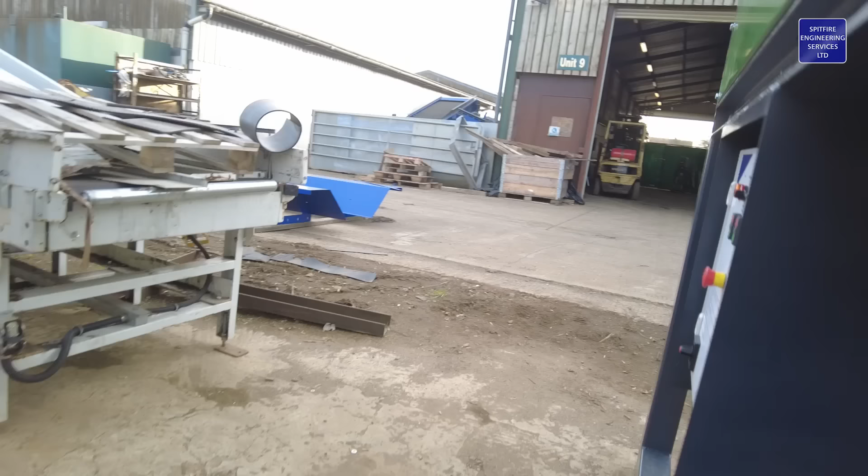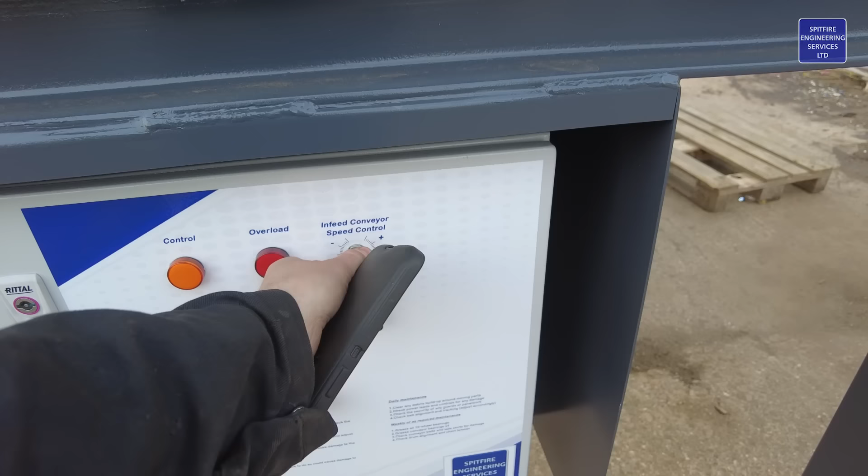We've got a standard infeed in this. If I come underneath, we've got the infeed in there, both the motors tucked over there, the cabling which comes down to this pretty snazzy control box. So the drum is at a set speed, that's a simple on and off, or off and on as I pressed it there, and then this is the infeed conveyor that is on and off with an inverter, so that adjusts the speed. Depending on how fast you're able to load it, or how fast you want the material to process, that is what you can adjust.

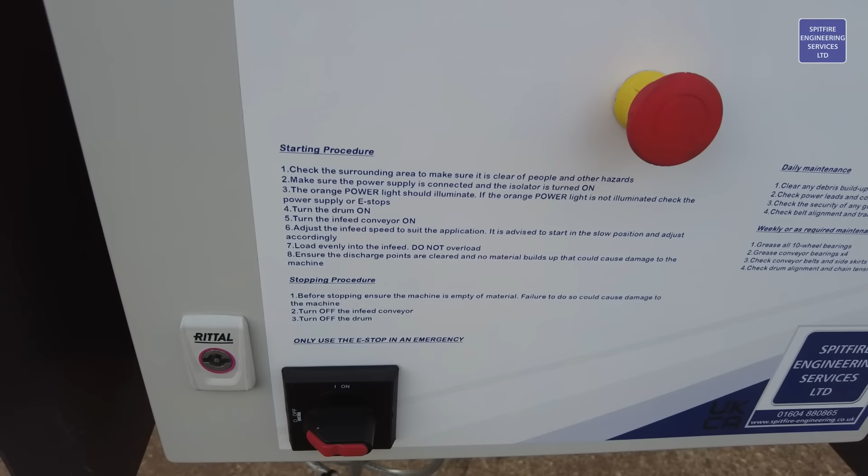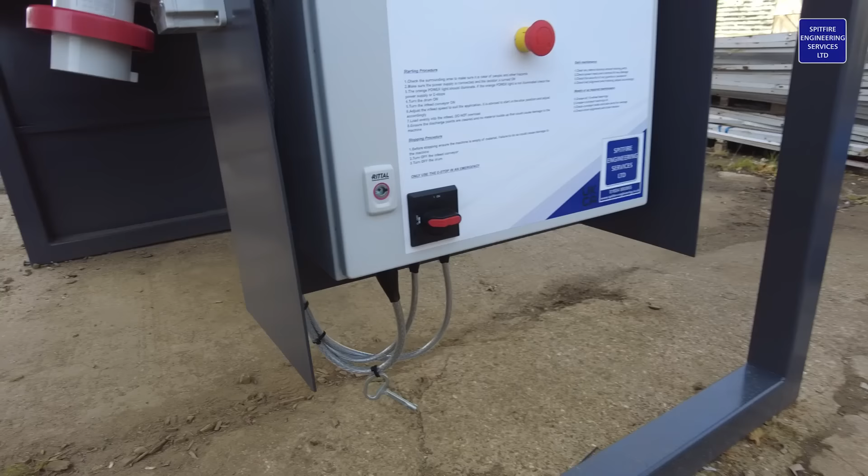And then just along here you've got all of the procedure for starting and stopping, and then the daily maintenance. So yeah, pretty cool bit of kit that is. And then it comes here with this lead, this plug here, which essentially allows the customer to have any size lead they want without having this dangling off and dragging everywhere all the time if they were to use an extension like the traditional way.

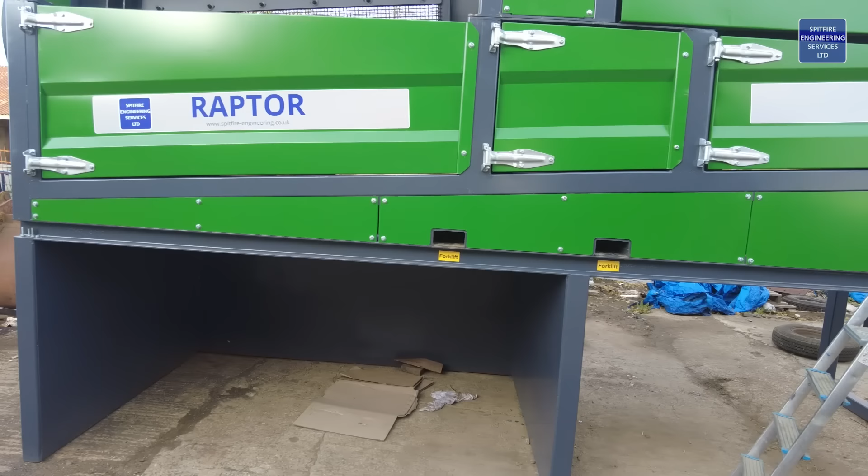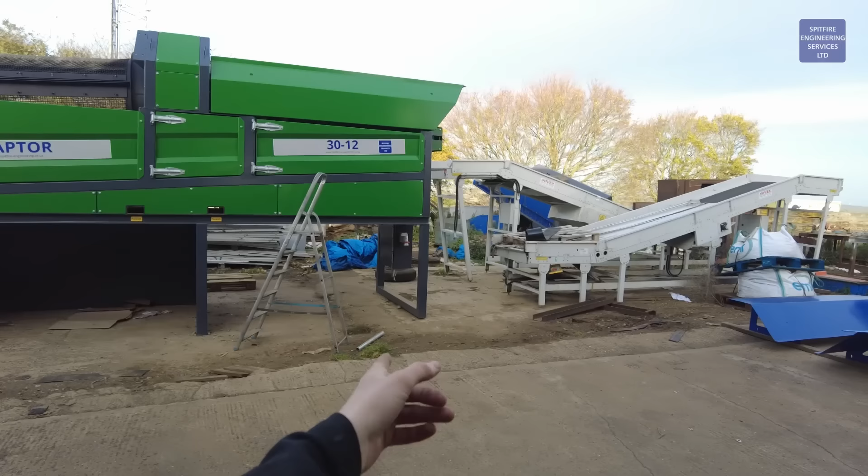So this is forkliftable, so we're going to load this onto the truck with a telehandler, I believe that is the plan. So this is great for carrying around sites, around your yard. Like I say, with the electricity over there, you can just pick it up and put it wherever you want. So if you've got power all across the yard, that'll work great. If not, it will work with a generator large enough, so Adam will speak to someone in the office and put the size of generator this machine requires.

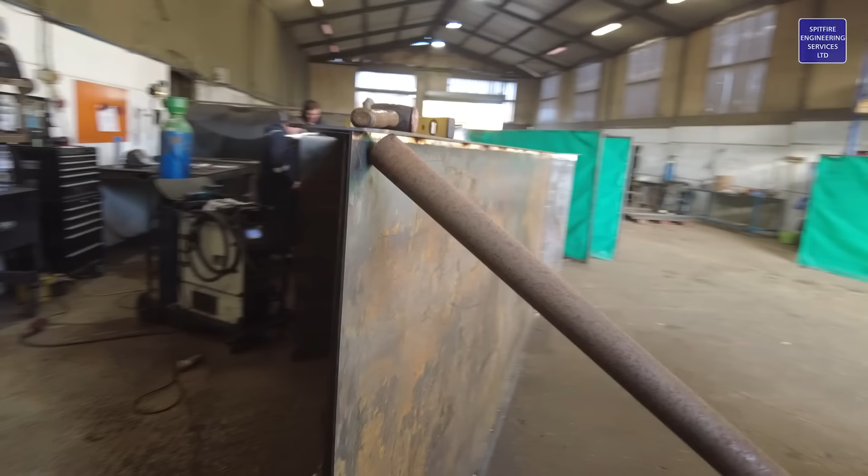So just over here, we've got Rob and Steve. This is the tank for the flotation tank. There's the heavies conveyor, which will be going in under here, and then the float conveyor that will go over there. Rob and Steve have got this tacked up within spec, so you can see that it's pretty big. I'm having to crouch down, I'm not that small that I can come in here without having to crouch down, but there's a fair bit of welding for them to do.

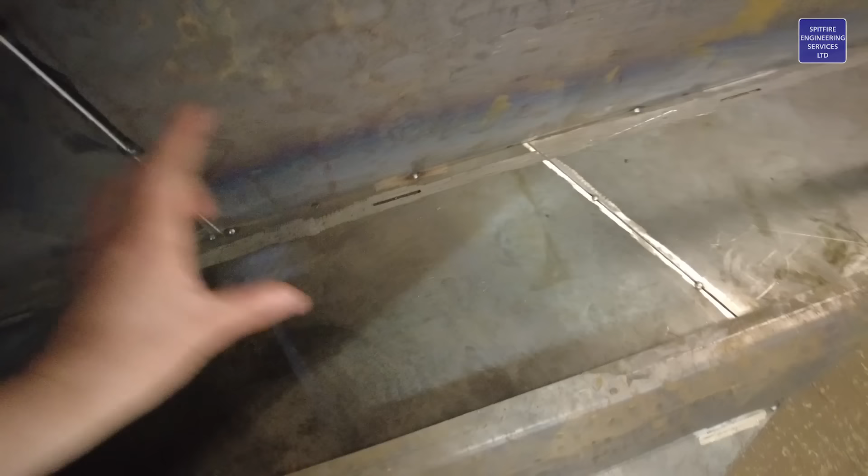So we've got all of this along here. There's then some more bits of steel to go over there, but they can't weld up this seam without it. So this can be fully welded inside and out. You can see there how they've got a nice gap the whole way along it, giving it full penetration, and that's the same on all of the joins.

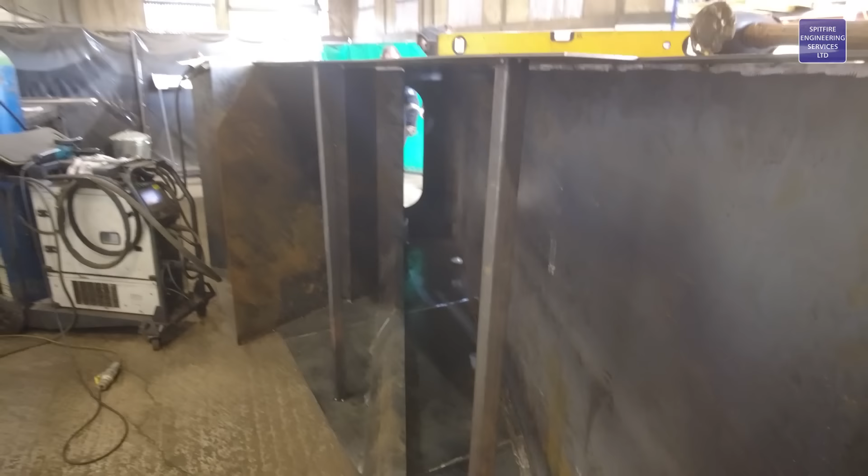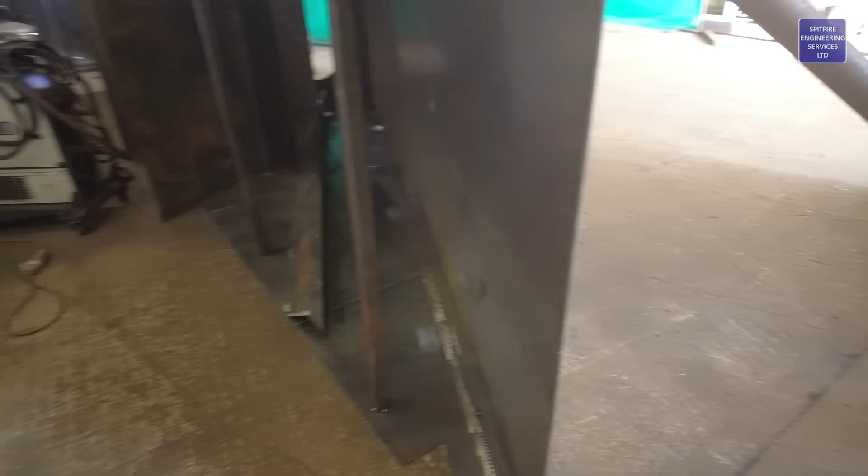Got a few bits of box section just tacked in place to stiffen it up while they are welding it and flipping it and whatnot. So yeah, I think the plan is to get this welded as much as they can today. The plan is ultimately to have this done by the end of the week, which is in my mind well achievable. As long as there's no big hiccups going forward, that does seem pretty achievable. So yeah, all tacked up, ready to go. Coming through into Rob's bay now.

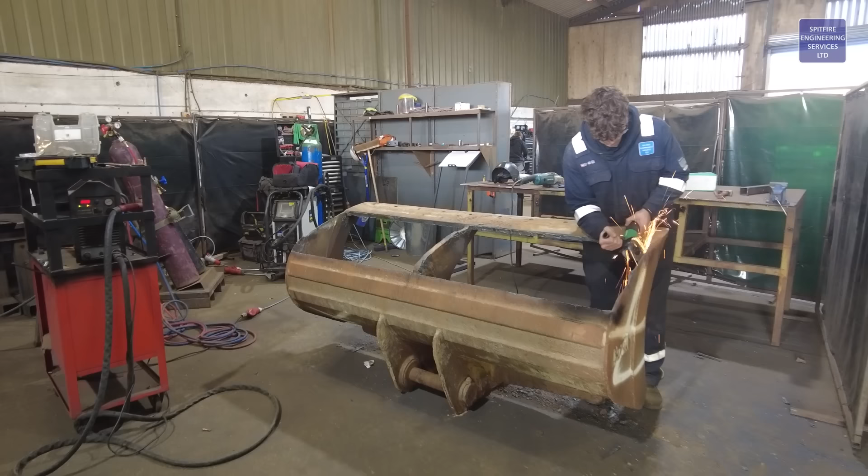Rob is not in there. We've got George, who is currently working on a bucket. He's been trying different styles of cutting the bottoms out of the bucket - on one side he used the oxyacetylene, and on the other side he used the plasma cutter. So there's pros and cons to both.

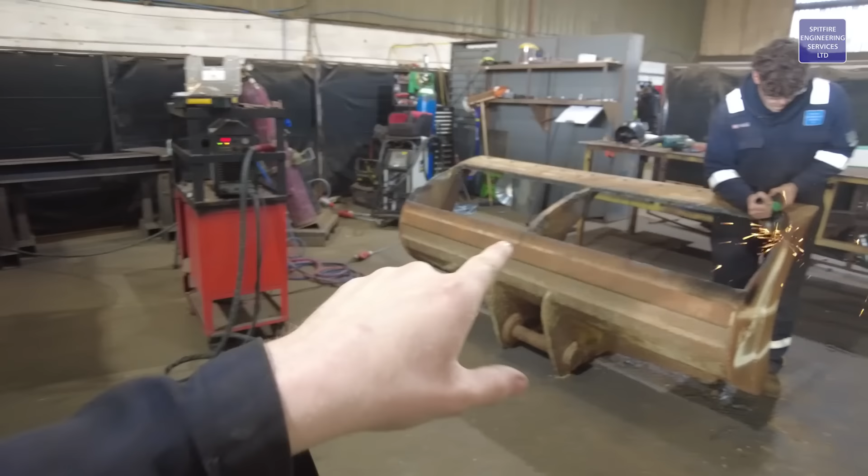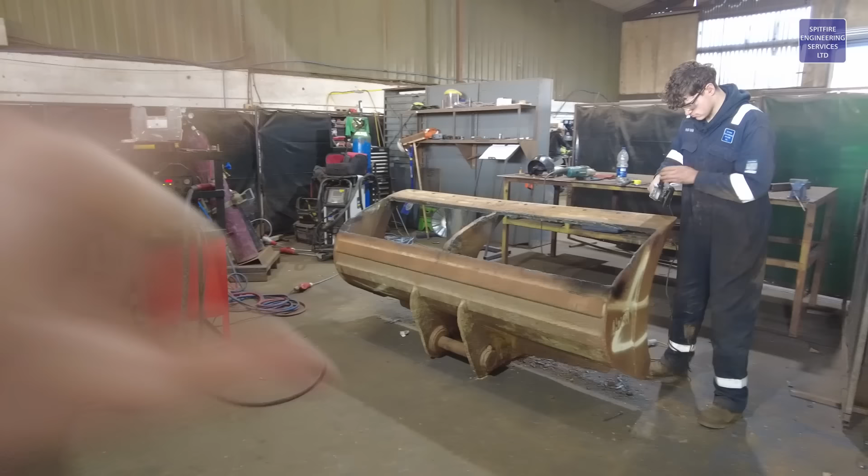You obviously need electricity if you've got the plasma cutter, which is hooked up there - electricity and air, since ours doesn't have a built-in compressor. So George has had to get the airline running through, which isn't an issue. The oxyacetylene is just on a little skid that we can forklift around. But what we've worked out is George actually works better with the plasma - we find it cuts quicker, it's cheaper to run than the oxyacetylene, and it gives a nicer cut.

So this is George's cut here, which for his first proper time on a plasma cutter is not bad at all. That is great, just needs a little bit of grinding and then that's all done. George's next steps are cleaning it up like he's doing now, and then measuring up to cut the floor.

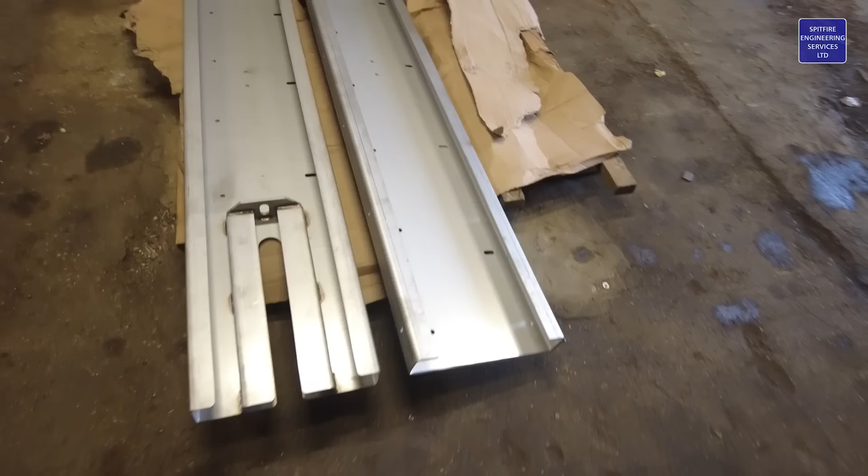So Connor is in the little workshop now, and these look a little bit different to our normal type of steel that we use. This is stainless steel, because this conveyor is almost fully submerged within the water. Connor has been TIG welding these parts up.

We've got him outside of the main workshop - there's a lot of metal dust flying around, a lot of contamination. So to minimize the risk of contamination from mild steel impregnating this stainless steel and causing it to rust, Connor is in this little workshop just tigging it along.

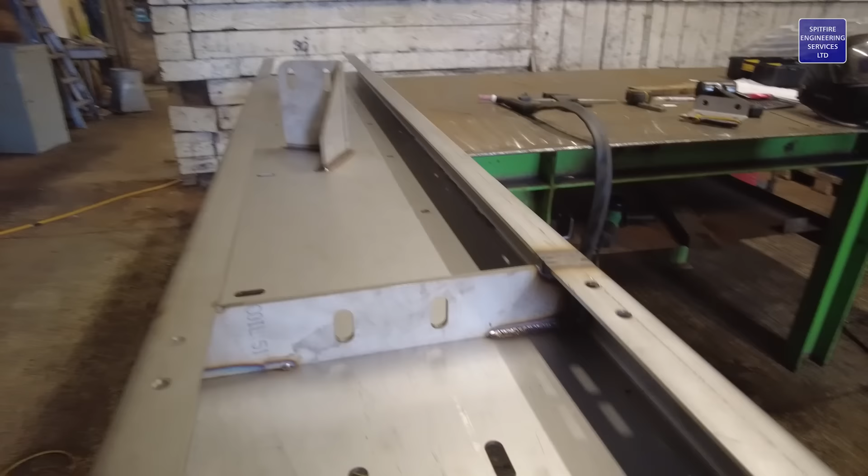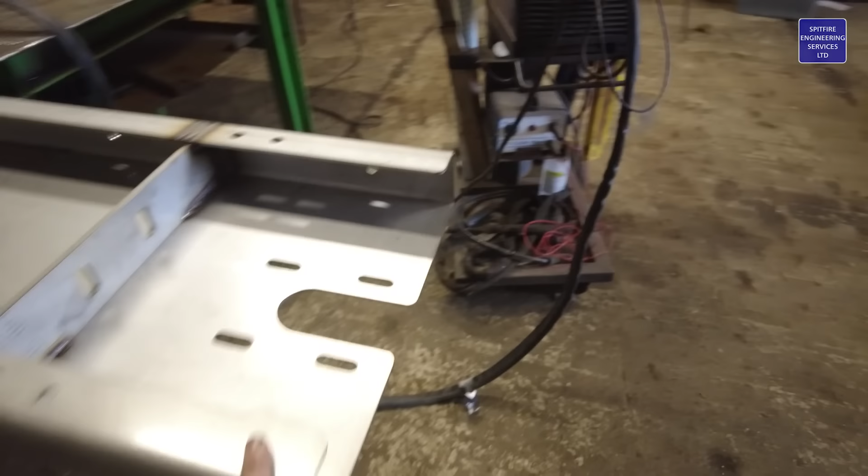So he's got another one of these to make up. I think he's fully welded this now, or nearly fully welded - he's got a little bit more welding to do there. Once fully welded, this is the head end of a conveyor side, and those are both tails. So he's got another one of these head ends to make, and then welding each head to each tail section, as well as a few cross beams.

So yeah, he's getting on nicely with this - not too much left of this now. We were talking earlier, we reckon it'll probably be done today-ish at some point. Not 100% sure when, but aiming for the end of the day for these stainless steel conveyor parts, and then probably going on to the tail roller for this, which is also stainless steel. So that's going to be a little bit interesting - however, very achievable still. Just got to give Connor the time and space he needs to get it tigged up.

So TIG is 9 times out of 10, or 99% of the time, a much slower process than MIG welding. However, it's a lot cleaner - it's much better for stainless steel. You can stick weld stainless steel, and I'm pretty sure you can MIG weld it too with certain wires and machines. We do have the capabilities, but Connor isn't trained up in stick welding stainless, so this is the best way of doing it. As I say, it's a lot cleaner anyway.

So these welds, nice as is, and then just under there is a weld cleaner. You put some solution on, brush it on, and it uses electrolysis to clean the weld - that removes any of that colour. It doesn't affect anything, no negatives or anything like that. It's just personal preference, and as a company we don't want it there - it just doesn't need to be.

What you often see is a lot of exhaust people - the fancy titanium exhausts or stainless steel exhausts people get on their cars - they often leave the colour on there and try to get certain colours on there. So there is a time and a place for it, however it's not necessary for what we're doing. It looks a lot smarter with it all cleaned off, because it just looks better 9 times out of 10. So yeah, that's the update from the workshop on this Tuesday morning.

So Adam's back behind the camera now, very happy from my side. He had a lovely time in Amsterdam, I'm led to believe.

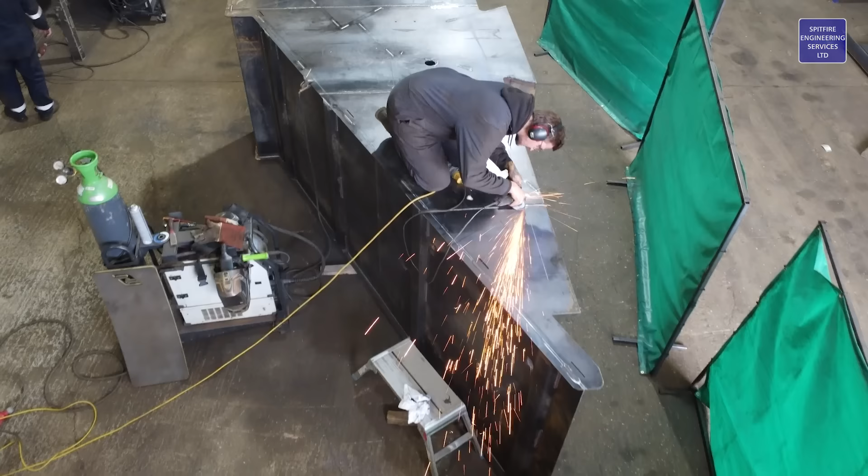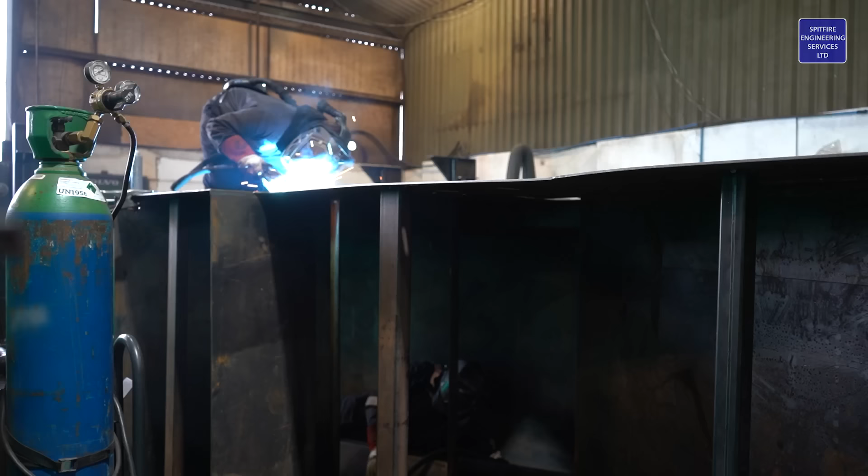In the workshop right now, we've got Rob and Steve in this bay, two bays conjoined into one at the minute. They are currently both welding up the tank for the wash plant project, the flotation tank. Steve's on the inside, Rob is currently on top. Two of the three sides are now done, and then they need to flip it. Once they've done this side, flip it up so it's stood up like it will be in use, and then weld that last side, get a few more beams in.

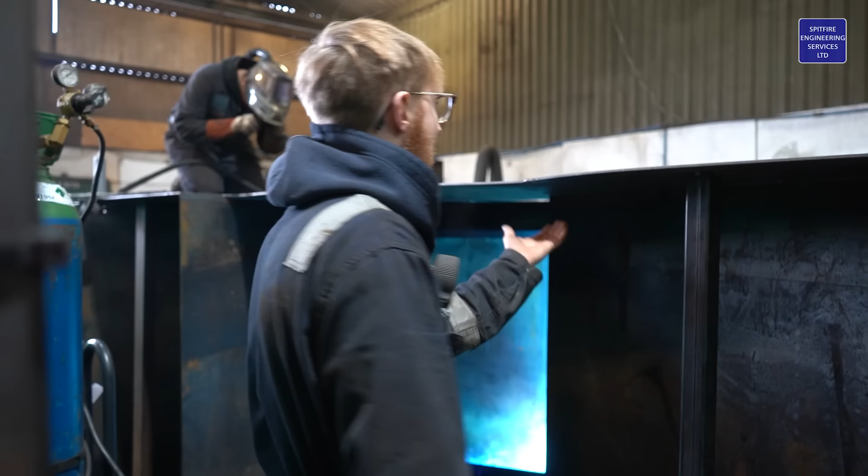You can see where there's a bit of distortion here, but once they've fully welded it and cleaned it all back, that will straighten itself out. We've still got some bits of angle, which Rob has already fabricated, to go along here, and that is what it's going to sit on onto the frame.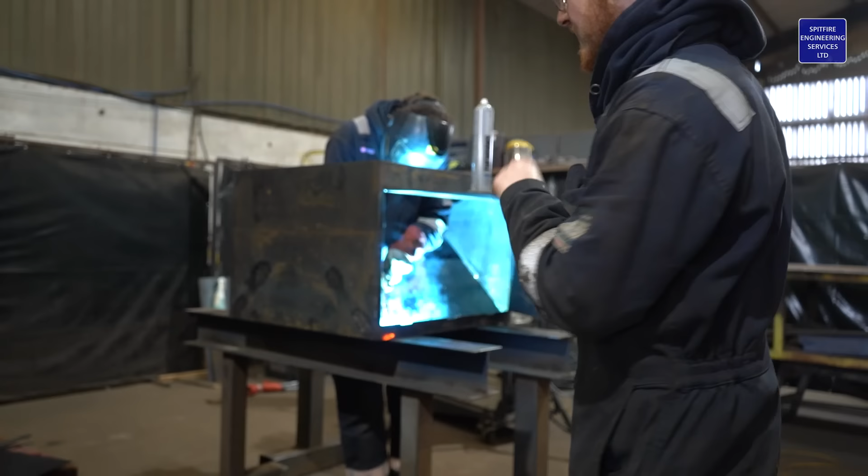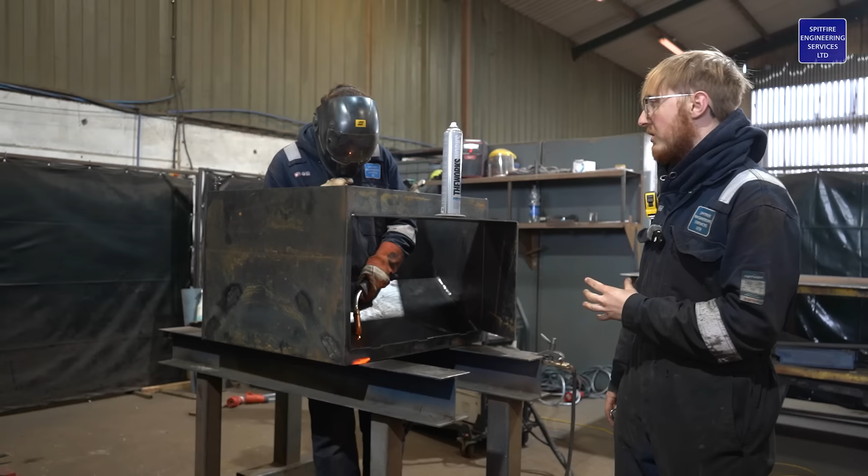Coming out of this bay and into what is Rob's bay, George is in here. George is currently welding the top deflector tank for this same wash plant project. This is the top bit where there will be a fan, I believe, sucking out any of the dust, and then the material will be loaded into here. George is just sorting that out now.

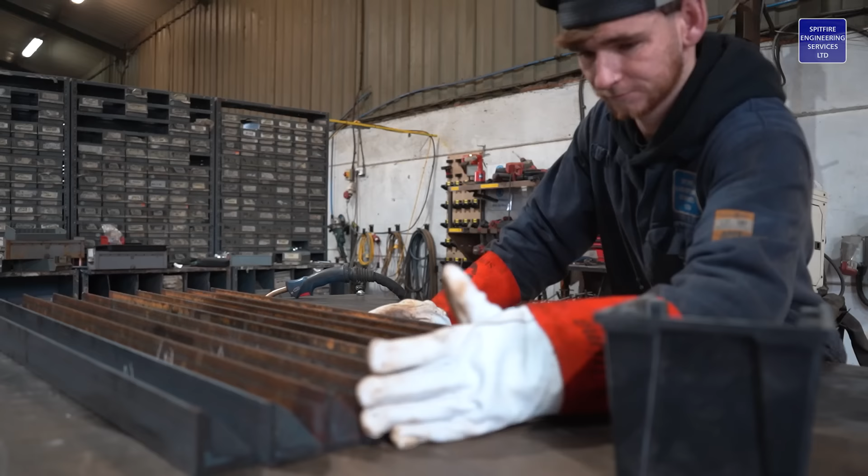Next bit I find interesting. Due to the workflow and how everything's organised itself, we've now got Ashley doing a bit of welding. Ashley does have previous experience in welding and fabrication, bits and bobs. He is about to be welding up some of the IBC lifting stands in this area, the assembly area. However, all of the main fabrication bays are full, and the small workshop has got the stainless steel conveyor in, so we don't want to be contaminating that. We'll leave it in there until all the stainless is done, and Ashley's going to be in here fabricating some of those IBC lifting stands.

This is the stainless steel conveyor. Connor has fully welded all this, and it's ready to be bolted up. We're going to leave it as is for now until that main tank is done and we can test fit it in there, because it will take up a lot more space once it's fully bolted.

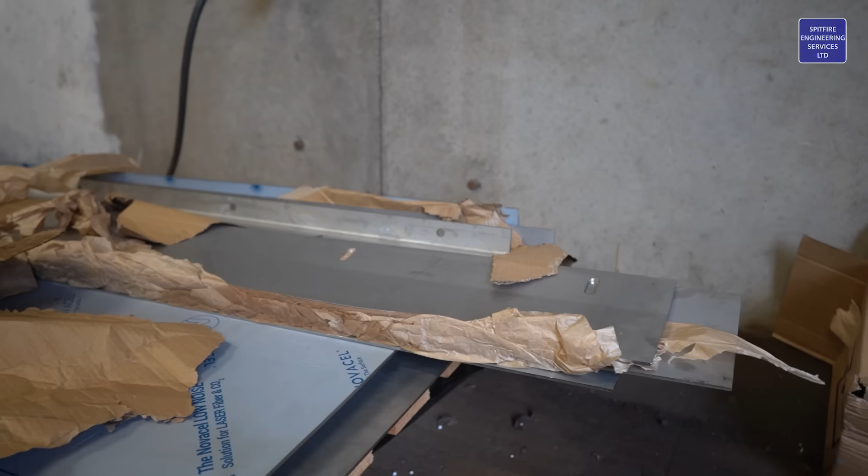There are middle trays, which the conveyor belt is going to go across. There's the main sections for the conveyor, side 1, side 2, the cross beams just here, and then a lot more of the side skirts and deflectors over here. So it's all ready to go now, just waiting on the stainless steel roller to be fabricated.

The tail roller is fully submerged, so that is going to be made out of stainless steel. However, the bar coming for that stainless steel tail roller, the skeleton tail roller, has come in at 16mm, and the holes on the laser cut stainless sheet plate steel are made to fit 20mm bar. So Melissa in the office is currently pricing up both. 16mm would be fine, 20mm would be fine. It'd be easier to fabricate out of 16mm, so hopefully it comes back cheaper, that we can get new laser cut parts to fit the bar, as opposed to getting new bar to fit the laser cut parts.

A little slight hiccup there, but in the scheme of things, not really a major issue. We're not in a rush to get that tail roller in, it doesn't need to be in for the test fit up, which we are hoping to do starting next week. It's Wednesday, late morning right now, and we're hoping to do the test fit of that main tank, as well as hopefully these two conveyors, early next week, which I think is achievable.

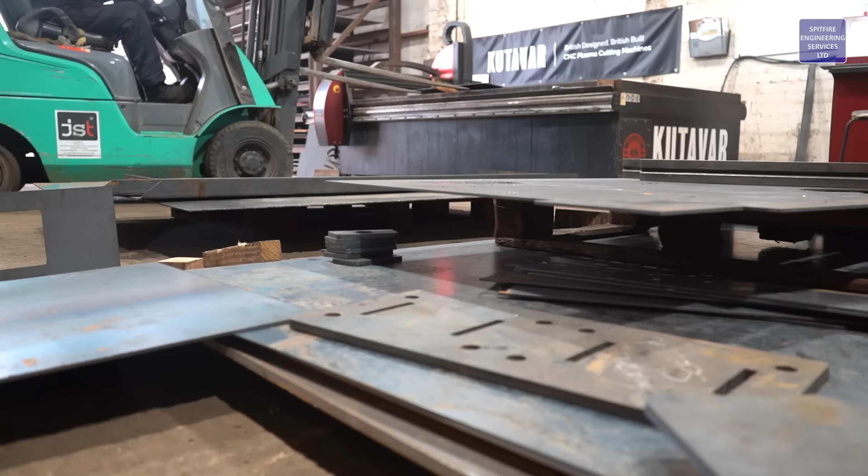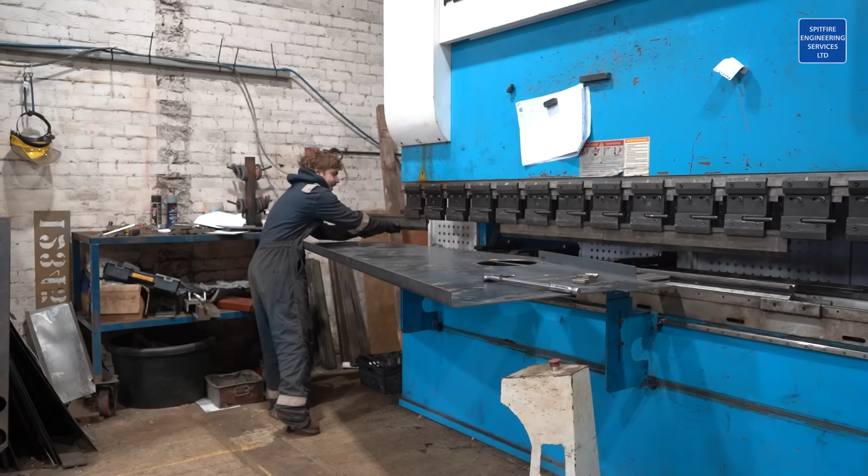I'll show you where Connor is at in his folding. Connor is currently in the cutting room on the brake press at the minute, swapping the tooling out to do the folding, and currently folding the dewatering screen. That is the somewhat separate part of the flotation tank aggregate processing plant, a standalone part, but it works in unison with the flotation tank. Measurements on this need to be absolutely perfect. We normally work with a couple mil tolerance, however it's even smaller for this specific part. Everything Connor's doing now is going to be paramount to make sure it works.

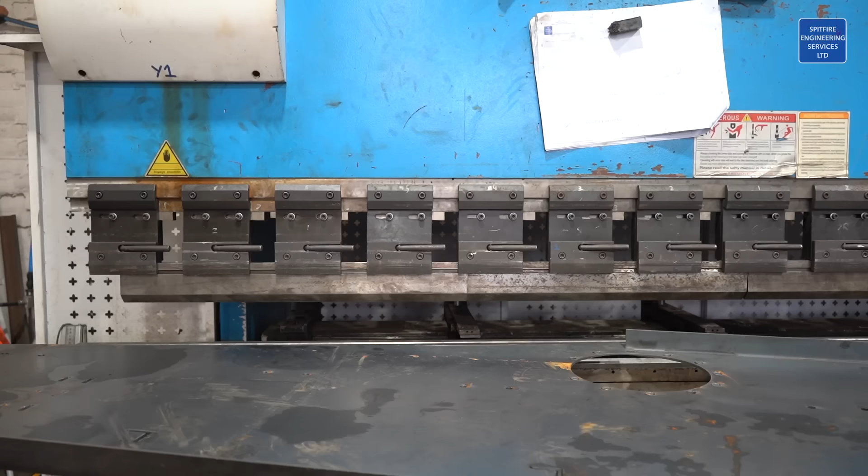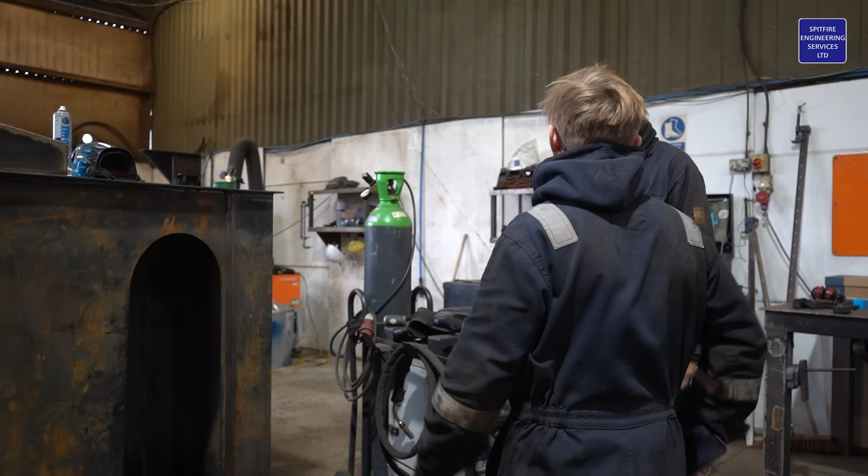You're doing both of them, the internal bits, when you flip it over? The internal bits for that. Oh, the conveyor bits, yeah. We're welding that fully. And that's all that's left for this side? Yeah, we'll do that in situ when it's the other way.

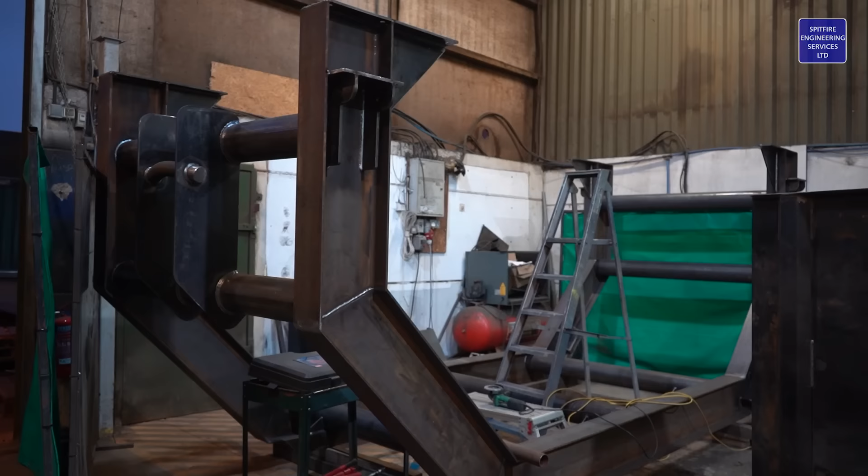This will be done end of the week easy, if all you've got left is them channels, the inside bits, and the door, and that tank thing. So that is Rob and Steve. They are welding this top angle bit, which is going to sit on the frame. That is the joiner between the frame and this main tank. That is all they've got to weld on this side.

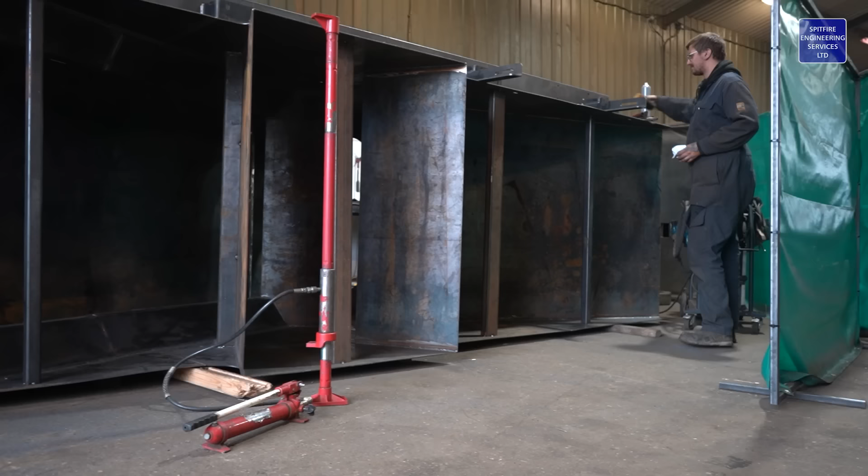And then they're going to flip it over 180, or I think it might be 90, and weld on some bottom conveyor slots, so it's just where the conveyor is going to sit onto, one of the conveyors. Then they'll flip it another 90 to 180 from where it is now, and weld on the other bit of angle. Once they've got it all welded up solid, they'll know exactly where that's going. And that is this done as much as it can be, pretty much.

So yeah, really not a lot left on this, and it's currently 3:15 on Wednesday. They said they'd have it done in a week, and it's looking on track to be done in a week, if not less, because the stuff they're doing now can't really go wrong. Other than the door at the end, they've already done most of it this side, so it's just the other side, which should be fine, and welding, which is the easy bit.

Nearly there. Yep. Cool. Ready to get jammed up and just bugger itself. You just get jammed up and bugger itself.

So just helped Ash put the wire back through the welding torch, it just got a little bit jammed up, don't know why. That's all sorted now.

So when you are feeding wire through a welding torch, it always helps to have it extended as long as possible, or as straight as possible, I should say. That just helps the wire so it doesn't wrap up. You can do it with it all coiled up, but there's no point. It's so much easier and less wasteful when you do it straight.

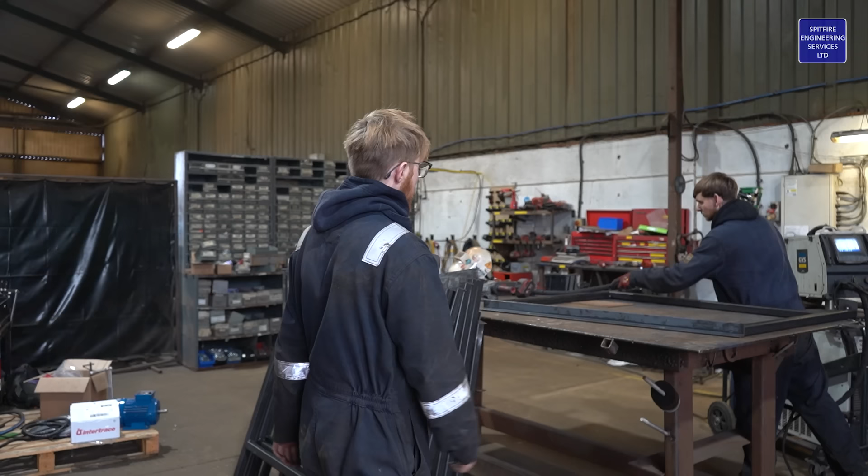So just doing that. Since you last saw, Ash has tacked up all of the sides for these lifting stands. They are a nice amount taller than the other ones previously. So yeah, these are a metre, I think, from this front edge, give or take. Yeah, a metre from this front edge.

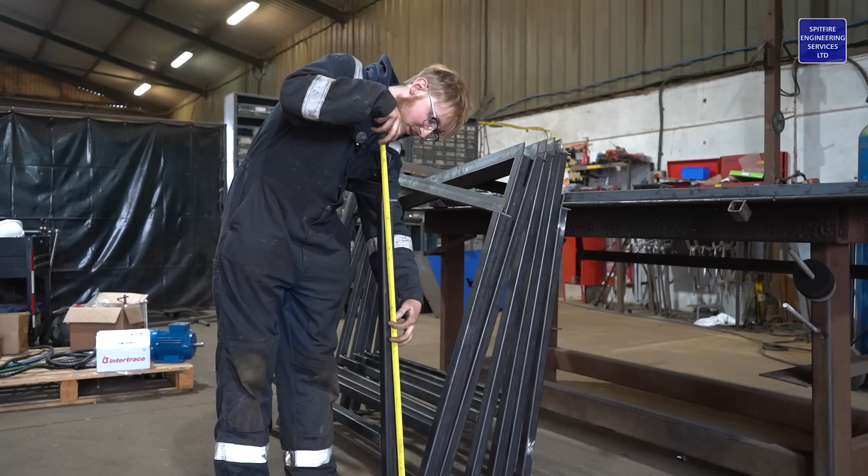So actually just tacking on some of the side posts here. These are the joiners that will go between, and there's also the angle iron joiners that will go between up here. So yeah, Ash is just going to get the rest of these tacked up like so.

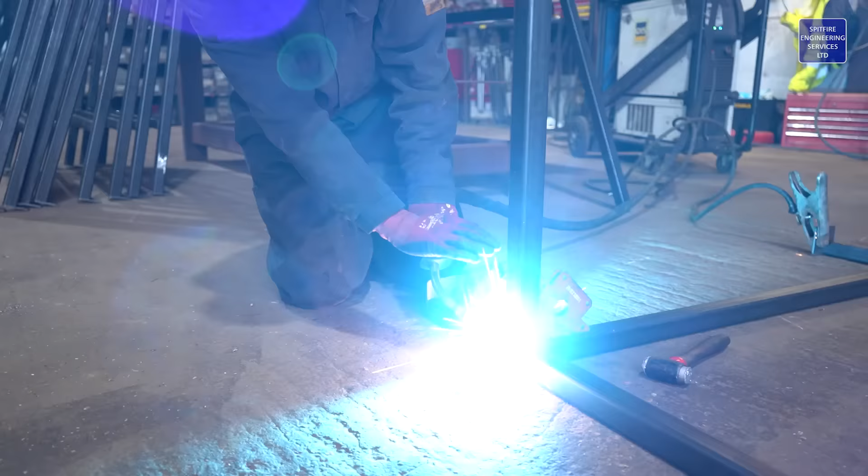And then him and myself are going to get the other sides on top. So let's say it's 3:15 now, we'll have, I'd imagine, probably all of them about tacked up fully by the end of the day.

So Thursday morning, I have got Adam with me. Adam's been on holiday this week again. All he ever seems to do is have a holiday, and all I seem to do is struggle to get content filmed because Adam's just not here. How many holidays have you had now this year? I think you've had more than me. So this is the first time on Thursday morning that me and Adam have actually spent any time together.

So I've got to go look at a job at Wellingborough for the council, believe it or not. Looking at a job for them over there. So I said to Adam, jump in with me, come over there, we'll do some filming and talk about some content for the future, different things, just talk about YouTube, have a little catch up. So Thursday mid-morning now, Adam is currently on site with Gav. I'm sure you will have seen or will be seeing some clips soon. So I'll just show you around the workshop, see what's happening.

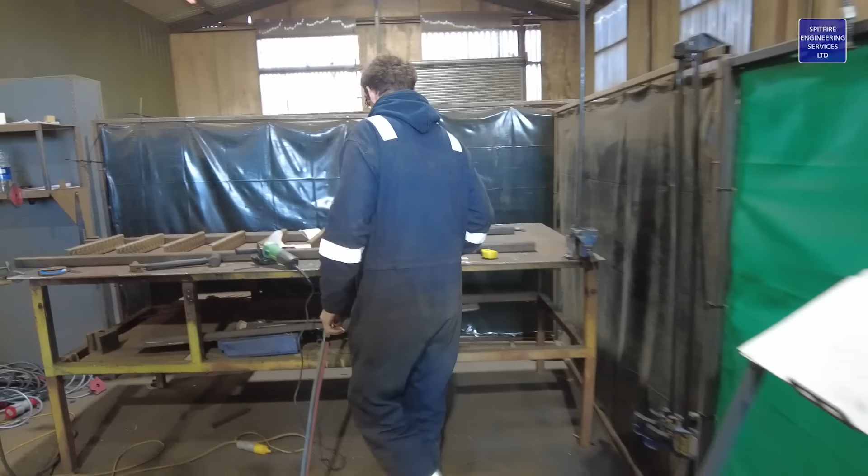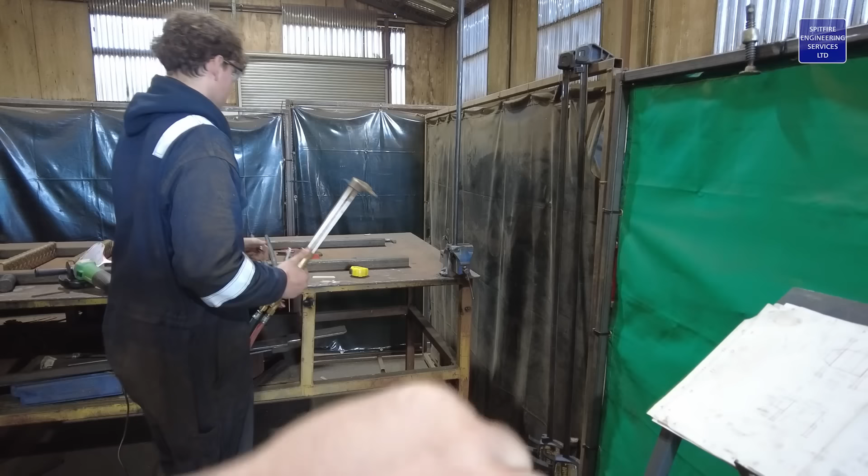So we've got George in this bay at the minute. He's currently in the process of fabricating a ladder. Well, there's two ladders, both identical, for the framework over there, which we'll show you in a minute. What he's currently doing is bending these bits of bar to act as the handles. So we've got one over here, which he is very kindly handing over now. Just put this on a trestle and show you guys.

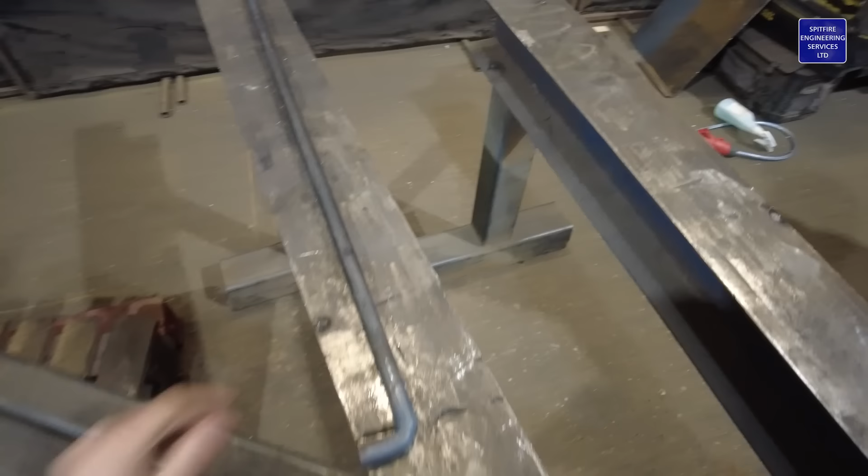Nice long handles, very easy to bend, just need a bit of cleaning up afterwards. Just heating up the gas axe, takes a couple minutes per handle. A lot easier than cutting and welding and cleaning back.

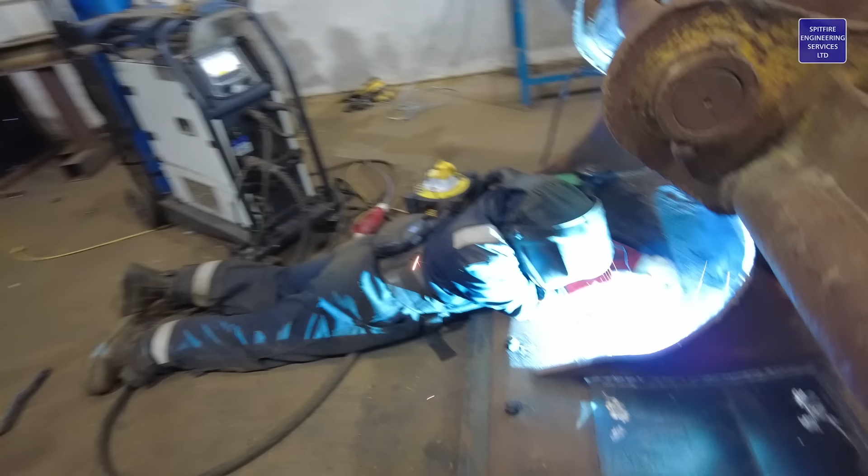So George is on that now. We've got Connor in his bay, currently welding the inside of one of these digger buckets. Not much left on this now, looks like one of his final runs. He's just finishing off that middle spine, then he's got this front edge onto the cutting edge to weld up. So he won't be too much longer on this one, then he'll move on to the next bucket.

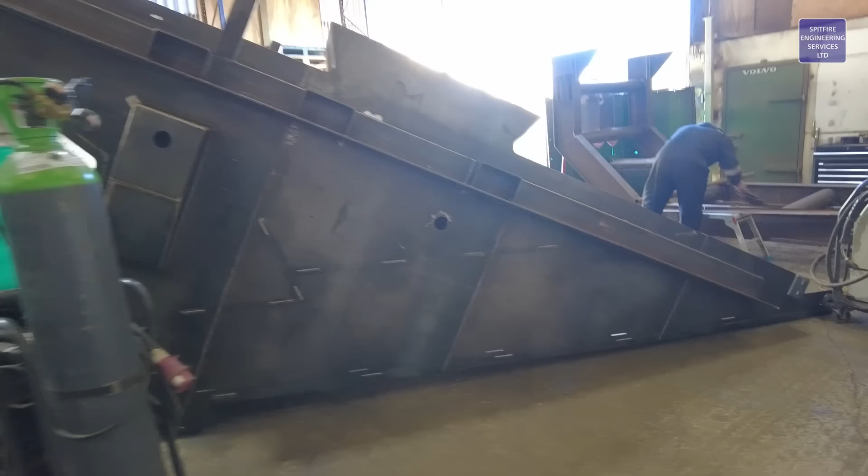Coming over to Rob and Steve now. The big tank has changed shape once again, or changed position once again. So it's now, so far, the closest it's going to be to the final shape. If you can imagine, that beam there will be level sitting across inside that frame. So two posts there, and then you've got bolt holes at the top and at the bottom, so they've been mag drilled out ready.

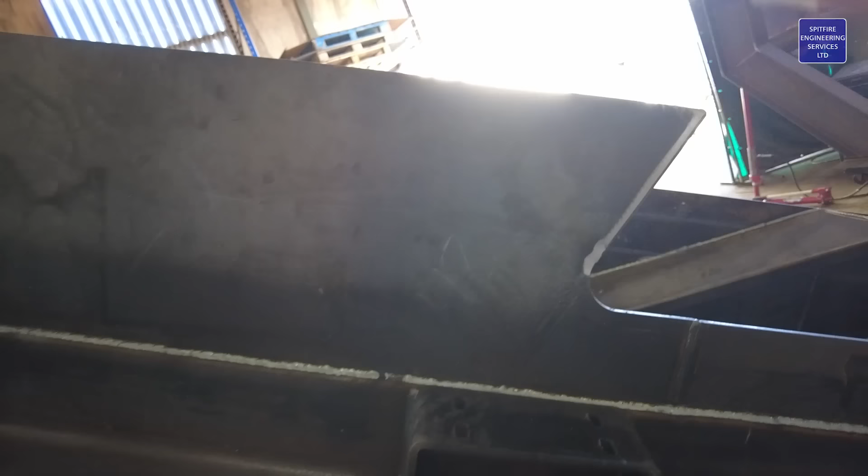On here we've got the mounts. These, I believe, are for the cross beams which George fabricated yesterday, and those two are for one of the conveyors. So Steve and Rob have got a few more bits to weld up and fabricate inside here, including the inside tracks which go along there. A few more things to weld up, and then this tank is pretty much done.

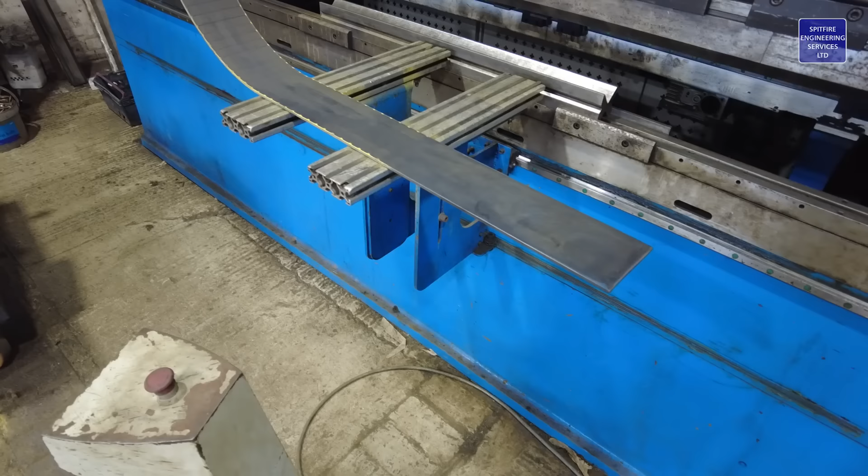At the minute, Rob is currently folding the back hatch door bit there. I'll show you that in a minute. So this is the profile of that hatch.

Rob has got two bits like this, and they will eventually form a set. So this is one, and there's another one to go on the other side, a mirror image of each other. Rob has got two bits like this, and George has done him a template.

This is the template that's been cut out of 1.6 mil, it looks like, with all these little notches in it. These parts were designed before this template. This is a hindsight thought, which George does normally do on a lot of stuff, putting these little notches in so we can just use a square to mark across all the lines. But due to the fact that this is going to be seen a lot more, we wanted it to be a nice smooth edge.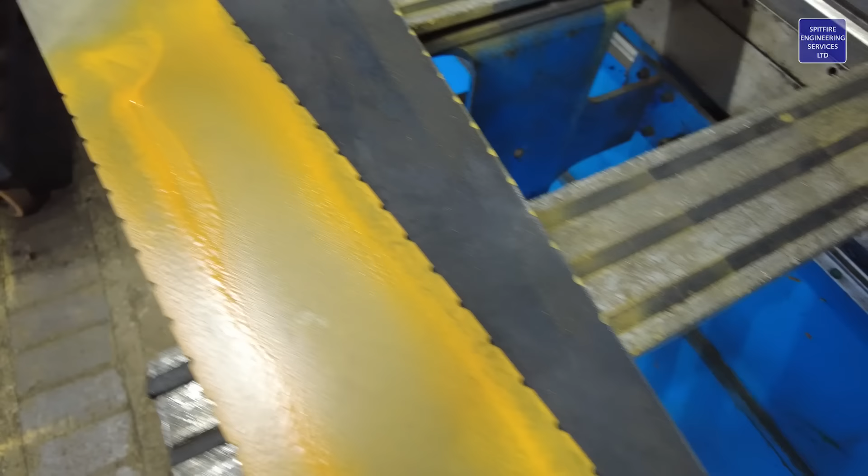The template has gone along, and then Rob has sprayed this with some line marker paint, so you can see all the little yellow dimples where he's folding. He's up to that fold there where you can see the brake press line, and he's still got the rest of these folds to carry on doing. So he's got a bit more folding left on these, and then it's time to start putting them in and getting the hatch on.

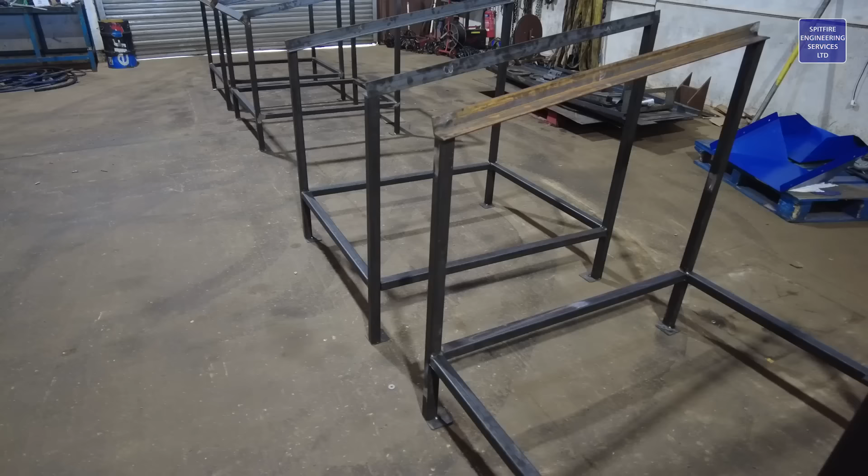So these IBC lifting stands are looking pretty good, nearly tacked up in position, just need the front and back beams going across, so there's two more left to do that for. These two here are fully welded, ready to go through paint, and Ash is currently welding the third one there. A little bit longer on these, and then these will get painted today.

Now, if you're watching this the week it's been released, it has been National Engineering Week. We record these episodes a week in advance, so for us now, through the power of magic and YouTube, I'm actually talking about next week, but by the time you see this, it's just been Engineering Week. That relates to everything engineering related, and it's a week used to promote engineering, the sort of stuff we do, encouraging people to get involved in engineering and celebrating how brilliant engineers are in society now.

This also reminded me of a fact that if you cast your mind back probably six or eight weeks ago, Archie and Connor both took part in a competition at Northampton University. Adam's going to put a little short clip in there just to remind us exactly what they did.

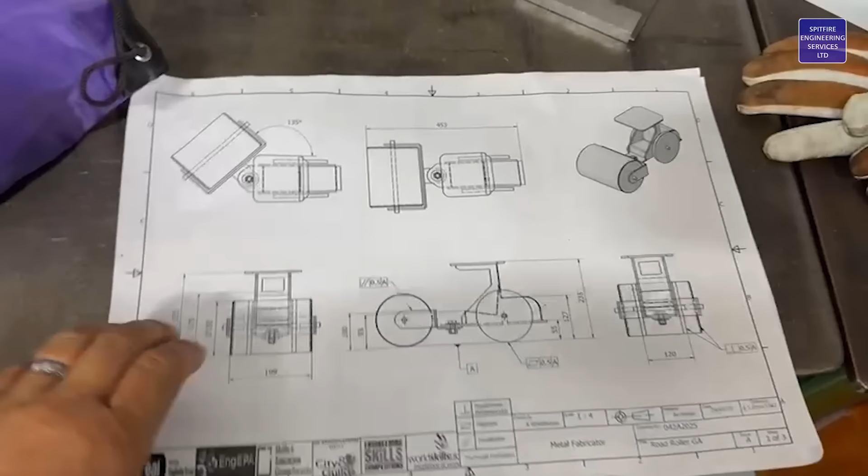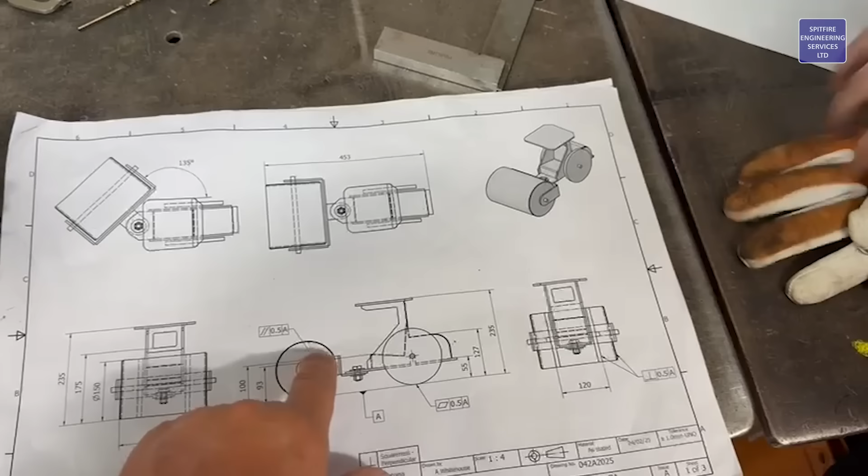So this is what they get given - this drawing, engineering skills competition at the bottom. Basically it's like a steamroller, a road roller, and they've got to make this from scratch. This panel here is cut apparently, but everything else they have to cut, roll that as a ring. So this isn't a piece of tube - they actually roll this here and cut all these other bits and pieces and put it all together.

So they've got all the drawings, and this is what they have to work to. As I say, this piece here is actually a profiled piece that they give you.

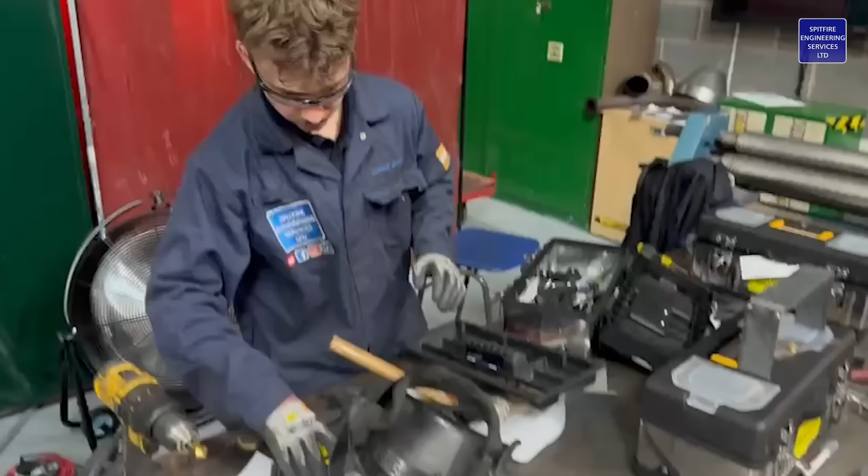How are you getting on, Connor? Stressful today - has today been stressful for you? Yes. Have you found it stressful today, Arch? Very. Arch has found it stressful.

I think it's a kind donation, isn't it, from United Welding, and they've asked me to do the honours. And today's winner is Archie. Well done, Archie - I was nearly walking off with that. It's yours. Cheers, thank you.

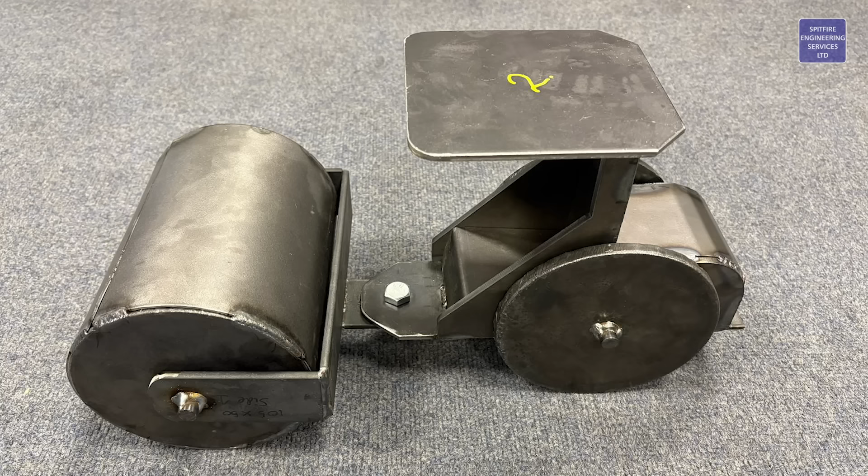So Archie won that competition at local level, which means he's gone through to the national finals. He's going to spend an entire week in Wales at the end of November, and then there's an award ceremony at the end of that, which I'm going to, and hopefully we'll do a little bit of filming when the time comes. If he's successful there, he will go through to the world finals, which apparently is in Shanghai in China. So we've got that coming up next month, and we wish Archie all the best - hopefully he's successful and he can go to China.

So we've got Rob and Steve here. Rob is currently over there, Steve's currently over there, and Connor's on the gas axe over there.

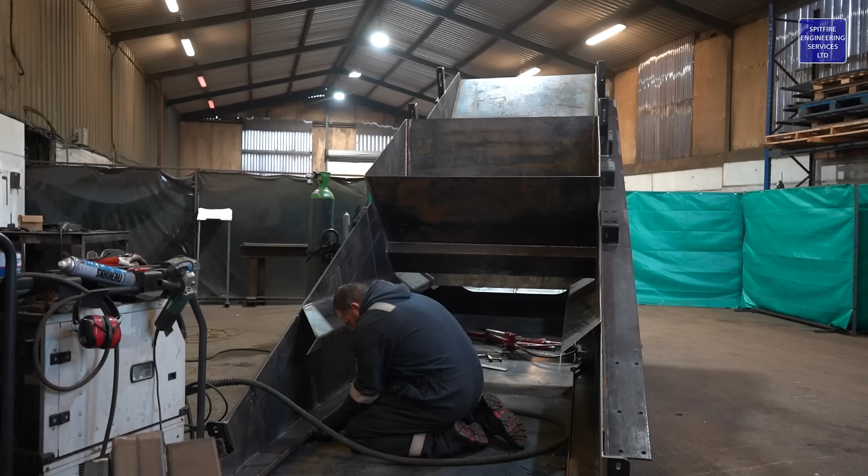The main water tank for this flotation setup, the main tank for the flotation tank setup, is very nearly done now. Steve is just currently working on the runners - the heaviest conveyor, the big long stainless steel one, sits on some runners, goes down either side, and that locates in position. So Steve's just welding those runners in place.

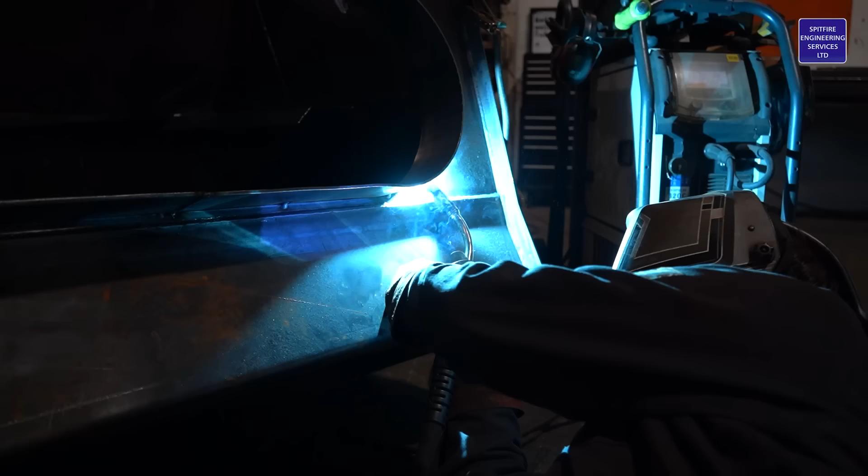Rob, just over here, he is currently welding up the hatch. There's an inspection hatch down the bottom here, so if there's any maintenance work needed inside the bottom, or for checking anything once it's been drained, there's a hatch at the back here that can be opened so you can gain access. All of the conveyors are designed so that if they need any maintenance, they can be very easily pulled out or lifted out. They've both got lifting eyes and everything needed to maintain them as easily as possible, because obviously the tail end of both of them are submerged underwater somewhat.

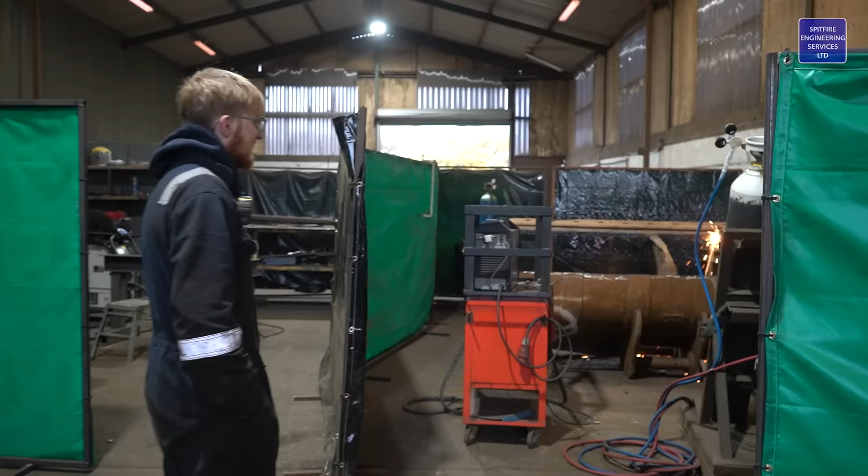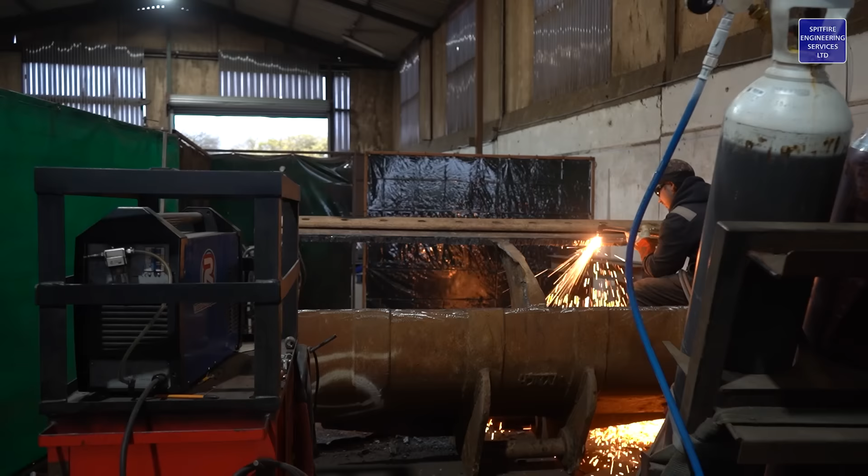So I'll take you over this way, where Connor, as you heard earlier, is on a gas axe. He's currently gas axing out the bucket - he's got the floor of the bucket out and he's just trimming off the weld to make it nice and flush. So he's got a bit of that to do, and a bit of cleaning up afterwards.

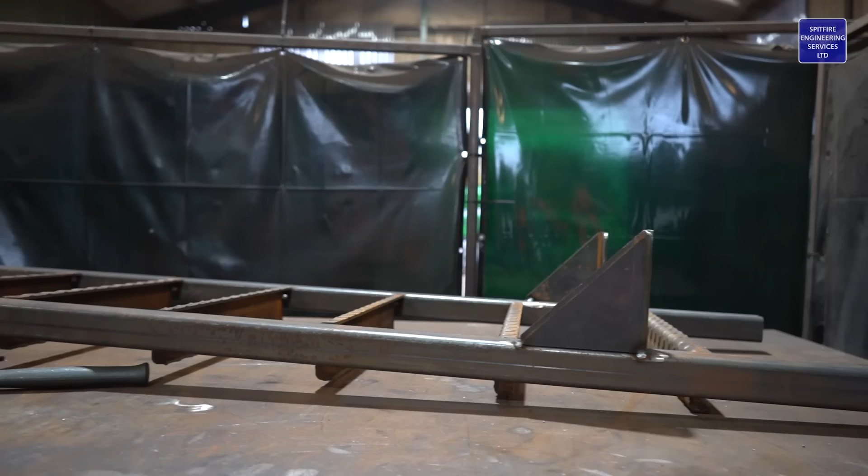Looking good. Coming over here, George is working on, or has been working on, this ladder. There are two of these that will be going on the dewatering screen flotation tank setup. These will mount between the framework and the top of the tank - pretty simple, with nice big long handles that George was bending earlier, and rungs very easy to put in place. Two of them, both identical. The other one is currently tacked up on George's bench over there, which is going to be welded very soon.

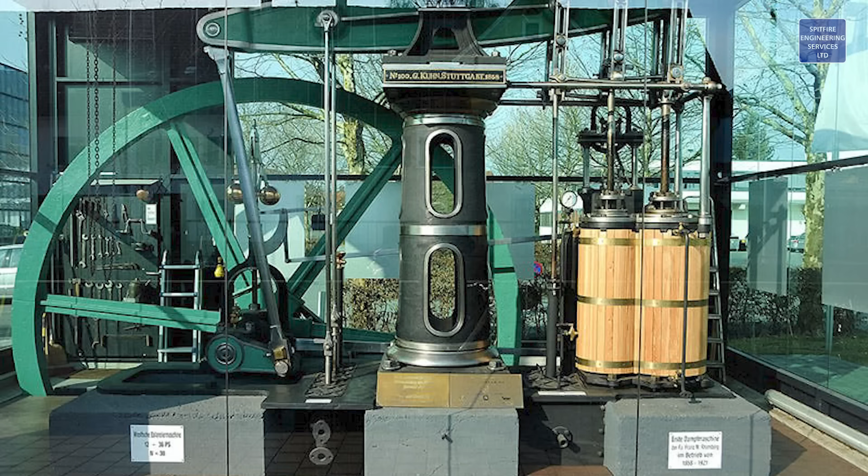So we go all the way back to 1805, and a man called Arthur Woolf, who was a Cornish engineer, worked out that if we used the steam that had been used in a steam engine, instead of exhausting it out and wasting that energy, if we used a big piston and a little piston, the energy that would otherwise be wasted could be reused into a second piston, which made steam engines a lot more efficient. So that's it for this week's fun fact. Arthur Woolf, Cornish engineer who tweaked James Watt's earlier design of a steam engine and made it a lot more efficient by using 2 pistons, one big, one small, and using what would have been the wasted energy from one cylinder going into a second cylinder. This week's fun fact.